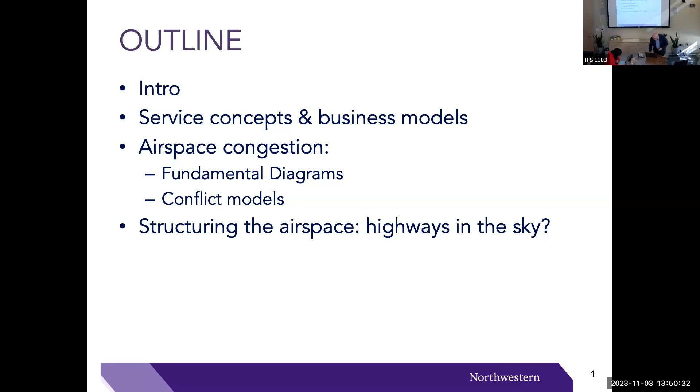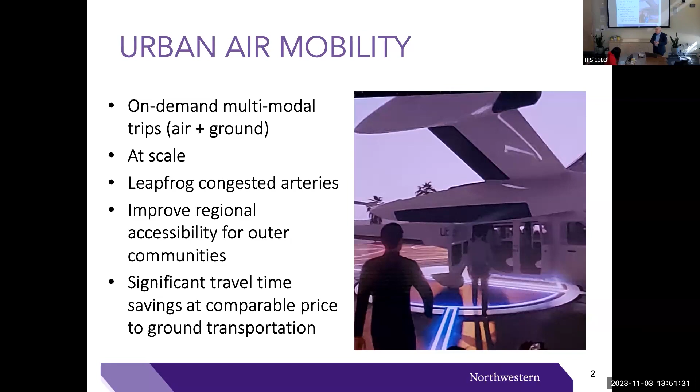Okay. And so the vision for urban air mobility is that it would be on-demand, multimodal trips where you have both ground, of course, for first, last mile, coupled with air, that it would be deployed at scale. You would leapfrog congested arteries. It would improve regional accessibility for outer communities, though it would also probably encourage more sprawl, which is not necessarily a desirable outcome, trade-offs here. Again, the vision was to have significant travel time savings at comparable price to ground transportation. So if you compare it, let's say, to rail transit, and if you can kind of bring it to the same price point, that was part of the vision.

Okay, and so there's over 20 companies that are very directly involved in developing the aircraft, but also in thinking along the lines of business models for providing service. These companies go from smaller ones, and so Joby is one of those. That's the company that bought Uber Elevate, along with all of the experts that were working in that area. And then you have various startups like Lilium, Volocopter, Kitty Hawk, and others. And of course, you have the big players, Airbus and Boeing are both very much in that space. And in fact, Boeing has acquired Aurora Flight Sciences, which is, again, developing tools in that area.

And you've seen different images of those. They typically have multiple rotors. Some of them, you start vertical and then they go horizontal. Others have multiple types. There's different designs there. You tend to have 4 to 8 different rotors, and these are envisioned to be electric. From a carbon impact standpoint, they would be unlike the jet fueled aircraft, right?

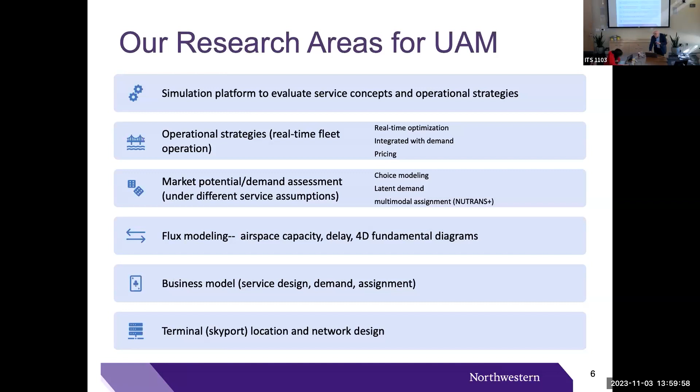And so in my presentation, we'll talk a little bit about dispatching strategies, but then mostly go into flux modeling and airspace congestion. The first one was part of the dissertation of Hani Ali Ahmad, and the second one was with Christopher Cummings, who is now actually working with United Airlines on some of these problems.

Okay. So there's 2 main service concepts that have been under discussion. One would be a skyport model, like Uber Elevate was considering, where you have a finite number of terminals that are strategically located along the area. Then you have air service between the skyports, so you could have some transfers potentially, as a way of consolidating the demand with an intermodal air and ground service. In some cases, you just stay in the vehicle, you don't get in the aircraft, depending on your trip.

Other times you will mostly use these skyports. And so that was an example in the LA area, if you were to locate 10 of these skyports. They're really vertiports is what they're calling them. They're fairly massive, and there's up to 300 transactions per hour that may be taking place there. So they're a very intensive kind of operation.

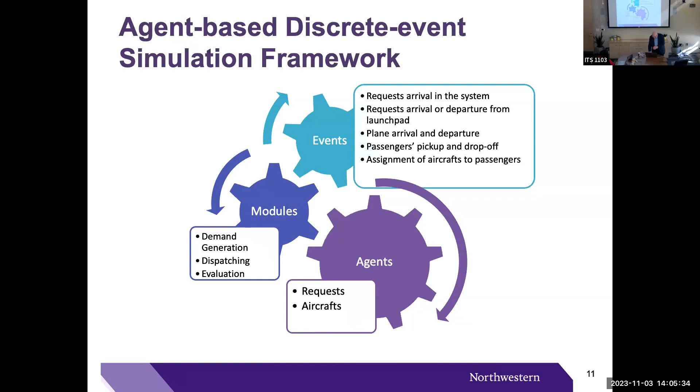What we wanted was to have the tools to evaluate it, given fleet, service, etc. We wanted the operator to be able to say, this is how many I can serve, and this is the kind of capacity that I would be getting from an assignment standpoint. Let's go quickly over the simulation tool that we developed to evaluate these kinds of questions, emulating the dispatcher operation, a fairly detailed dynamic optimization with a rolling horizon, where you have the network, the fleet, requests, new requests coming in, and we emulate what the dispatcher might be doing, and that's a whole other talk. All right.

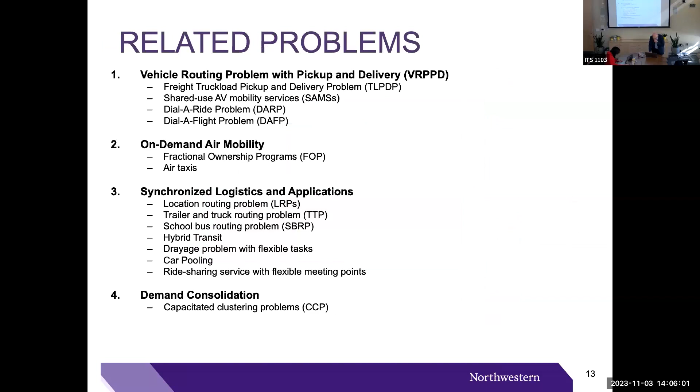So some of the main takeaways from that, kind of skipping because I really want to get more into the flow modeling. Demand consolidation could in fact significantly decrease the aerial mileage per request and also increase the number of served requests, which in turn increases the total travel time savings compared to ground-based transportation. The effectiveness of the demand consolidation scheme is dependent on the demand pattern, how dense versus sparse it is, and the pre-specified level of service, that is, the maximum tolerable delay before you embark on the trip, has a significant impact on the number of rejected requests. So there's quite a bit of sensitivity to that factor. And this is all based on the analysis that Hani had done.

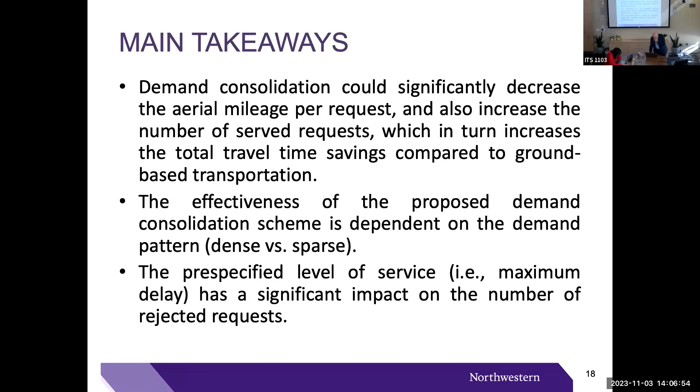If any of you are interested in that side of the work, I didn't want to get into it because it's really elaborate formulations on the optimization side. And it's hard in 15 minutes to convey all of that if one doesn't have the full background. Whereas the flow modeling, I think, is much more reachable. And frankly, we've done a lot more interesting work, in my view, on this side right now. But if any of you are interested in the service model, the real-time dispatching and so on, we have a couple of papers, I'd be happy to share them with you.

Okay, so the question that came up was, what happens in the sky? Is there that much capacity that we could deal with all of that demand? We really didn't know when we started looking at that. And some of the motivating questions, as I said, were how congestible is airspace compared to highways? Does adding a third dimension solve urban traffic congestion problems? What might be a practical capacity for such systems, and where is the bottleneck?

And what is the effect of different spacing requirements between aircraft, horizontal and vertical? And what is the effect of the maximum speeds of aircraft? Does that really change the flow patterns that emerge? And so we thought that as urban air mobility scales up and more vehicles enter the airspace, operators and regulators will need an understanding of air traffic flow.

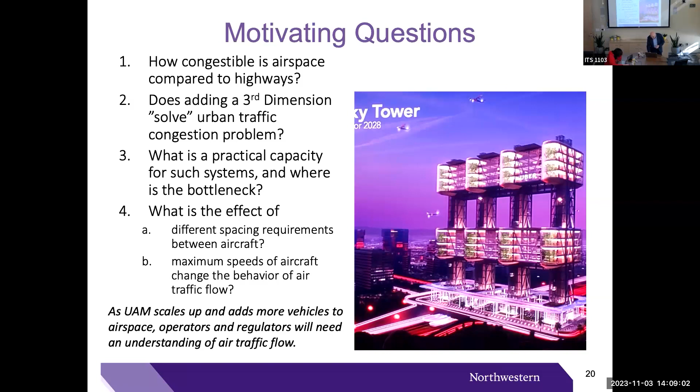And the image that I have here, this is a rendition of what these horrible vertiports would be looking like. They would be massive structures, and that was in some of the early Uber Elevate kind of visions. And you don't want that in your neighborhood, right? But that's kind of the model that they had envisioned, and then they hired top architects to design a much better looking and integrated kind of vertiport. But that was one of their initial proposals.

Okay. So some basic concepts here in aircraft routing. There's different types of routing through airspace. Basic flight would be no routing restrictions, and the aircraft are responsible for self-separating. Basically, that's what birds do, right? They figure it out, they manage their conflicts. The other one is free route, where there's no routing restrictions except for advice and deconfliction from an urban traffic manager. Or you could be in corridors.

Or you can have fixed routes. And so this is where, like system optimal routing on highways, for instance, you determine for each aircraft what route they should follow, and there is a central controller that is providing these fixed routes. And this gives you an opportunity to manage it best.

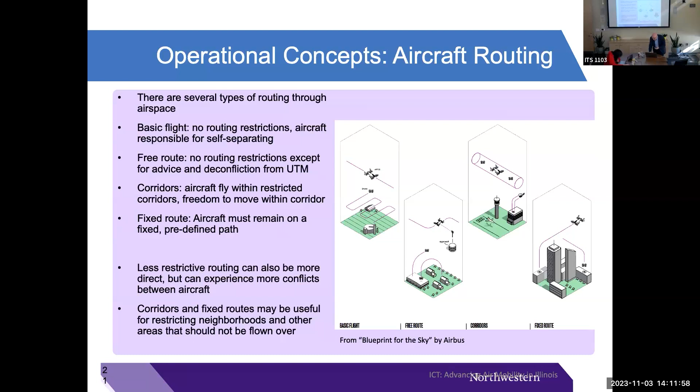So, okay. There's been a growing literature on the airspace management angle. But nobody had examined the congestion part, which is where we came in ultimately. There have been several new airspace concepts proposed to integrate advanced air mobility operations into the existing system. The Federal Aviation Administration has documents outlining a concept of operations for these services. And part of what they're proposing is you have different types of vehicles, different classes at different heights.

And so your UAM corridor would be somewhere above the little drones that are flying, maybe the ones delivering packages and things of that nature. This is where the more serious urban air mobility vehicles might be flying. So they would be closer to 700 to 1,000 feet in height compared to below 400, which is reserved for the smaller fry there.

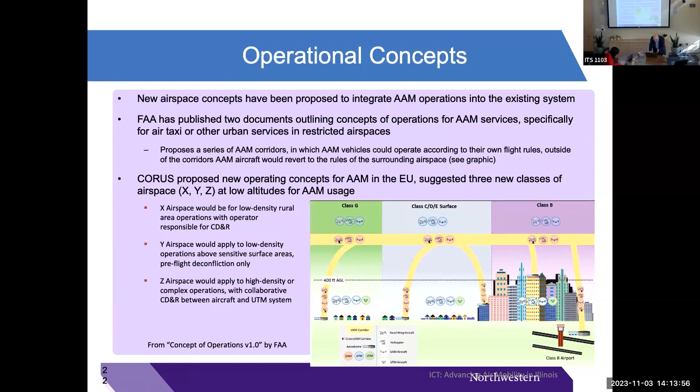And again, there could be multiple classes of vehicle here, and so they call it the XYZ concept, where X airspace would be for low density rural area operations with the operator responsible for dealing with conflicts and so on. Y airspace would apply to low density operations above sensitive surface areas with only pre-flight deconfliction, whereas Z airspace would be high density with complex operations with various collaborative features between the vehicles. So that's the concept of operations version 1.0 by the FAA.

And so when we got into this, my former student, Chris Cummings, was very interested in this topic. He was taking my traffic flow theory class. They have to do a paper. And I told him, maybe you should build a simple simulator, and let's see what emerges, and that's what he did. Because my notion was, we should see a fundamental diagram emerge.

Because for birds, for many species, we tend to see fundamental diagrams. And I said, just build a simple simulator and let's see what emerges. So he built a simple simulator to emulate these aircraft and then look at how this, does it congest? Do we get a fundamental diagram? And can we then use concepts from traffic flow theory to examine this situation?

And so in his simulation, he used a decentralized system of air traffic control, where each vehicle is scanning for potential conflicts and then resolving them individually. So his initial simulation was more like free flight with decentralized conflict resolution. But he did the conflict resolution in a very careful way, and he found in the literature a nonlinear programming formulation for that problem, where you consider what's around you and then you can optimize your position accordingly.

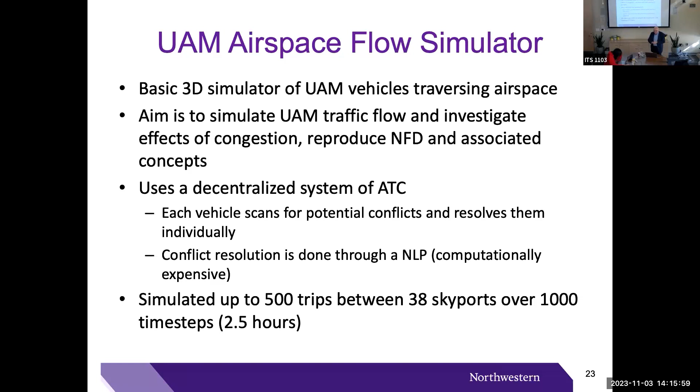Which means, simply speaking, if you sense a conflict, and where the conflict is an important parameter in this, if you sense a conflict, you're either going to deviate, or you're going to go up, or you're going to go down. And so those are the maneuvers that you might do. And he started by simulating just 500 trips between 38 skyports over a 2.5 hour period.

And in the assumptions he made, vehicles have true vertical takeoff and landing capabilities. He assumed them to be able to fly at up to 100 miles per hour horizontally and 25 miles per hour vertically, which is within the range of what industry tells us we would have. Then he did sensitivity to all of that. The minimum vehicle spacing was set to 30 seconds of maximum velocity, which is about 1.3 kilometers horizontally and 0.35 kilometer vertically. That's when you translate them at the maximum velocity of 100 miles per hour.

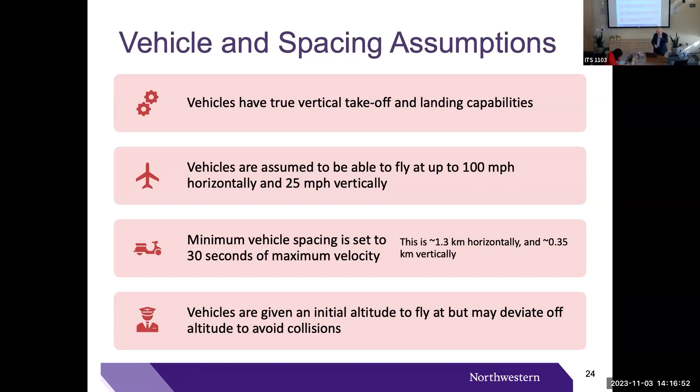And vehicles were given an initial altitude to fly at, but they may deviate to avoid collisions. So everyone goes to some level, and we had discrete levels to which these aircraft were going. And so I can show you what the simulation looks like. Okay, so this is the top view, and the blue squares are the vertiports, and so you have travel between these vertiports. This is a top view, and then you have the side views here, and this is the 3D view that you could see there.

And so you could see them going up to a certain level, and in some cases they drop down to go back to their destination. In this case, it's still not getting too congested, but let me move it a little faster. And you could see there's a lot of balls in the air, right? And you could start seeing conflicts that are forming, and you could see them slowing down also at some of these levels because of the conflicts that may be developing. And we can have a little bit of bottlenecking happening in there. This is our first set of simulations.

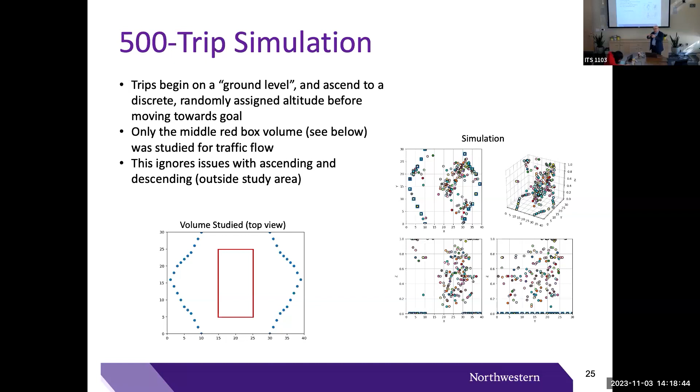So for the vehicle, this should have a speed range, otherwise they'll drop down, right? Yeah. Well, they could hover. Oh, yeah, they could hover. There's no problem with hover. They don't communicate, right? Or do they? You're sensing the vehicles around you, so yeah. So you're just dancing. There's no actual communication between the vehicles. There is not much coordination. Well, there is coordination because we assume that there is a central controller that's deconflicting, but only among neighbors. Only among neighbors, not for the entire system. It's decentralized among neighbors.

And so we then said, well, let's go back to our basic traffic flow theory here, right? So what we did is extended essentially Edie's definitions to 4 dimensions. In the original traffic flow theory, we had 2 dimensions, which is X and T. When we went to networks, we had X, Y, and T. Now we have X, Y, Z, and T. And so this is why it's 3-dimensional space, but 4-dimensional fundamental diagrams.

And in this definition here, if you look at the definition of the average flow and the average density, it is extending Leslie Edie's definition, where to get the flow, it's the sum of the distances traversed by all of the vehicles over an observation period. So DI is distance traveled by vehicle I, summed over all the vehicles, divided by the dimensions X, Y, Z, and T, because the vehicles can go everywhere in that space. And then to get the density, it's the total time, the sum of the time that is spent by the vehicles.

And in this case, our observation period is this X and Y that we're considering, but the entire depth of that. Okay, and of course, then you get the speed is just the average speed, this total speed divided by n. Yeah. So Hani, you have 2 speeds. Q divided by K would be the total distance divided by total. Correct. You get the same thing. Yeah, exactly. But I'll get more to speed because then there is an effective speed, effective flow.

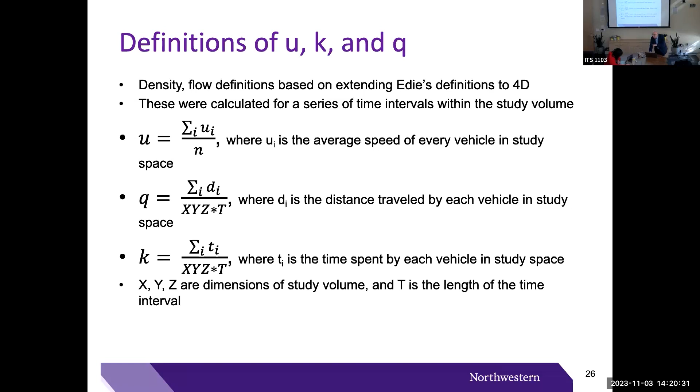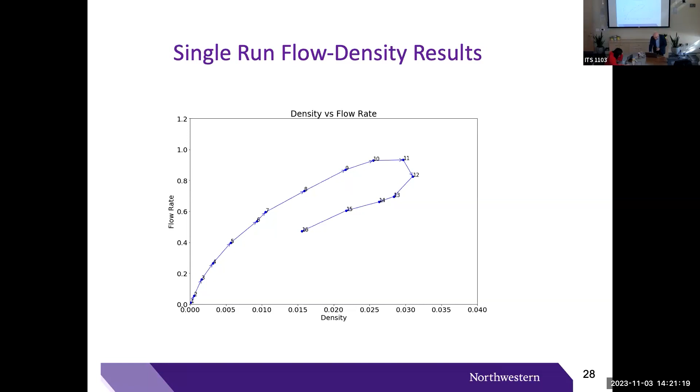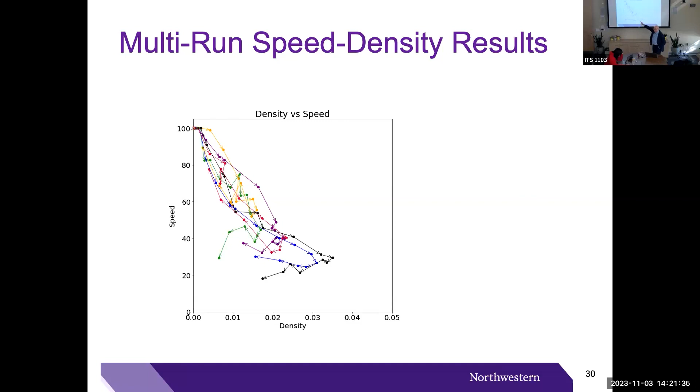So that was how we got started in this, and we did multiple runs, and they were all showing us the same thing. And then we varied a few elements, and then you plot the speed versus density, again a similar pattern with the hysteretic part that goes on the other side. But that was a starting point. We said there's got to be a way to do better theory, because this is something that emerged empirically.

And so Chris started looking at a gas theoretic model, because these are like particles of gases essentially. And so he built a theoretical model where vehicle density creates conflicts. That's the starting point, because more vehicles in airspace increase the chance of conflicts for each vehicle. Second, conflicts decrease the effective speed and the actual speed. Effective speed is the speed in the direction that you need to go. So if you're going back and avoiding and all of that, that's a reduction in your effective speed.

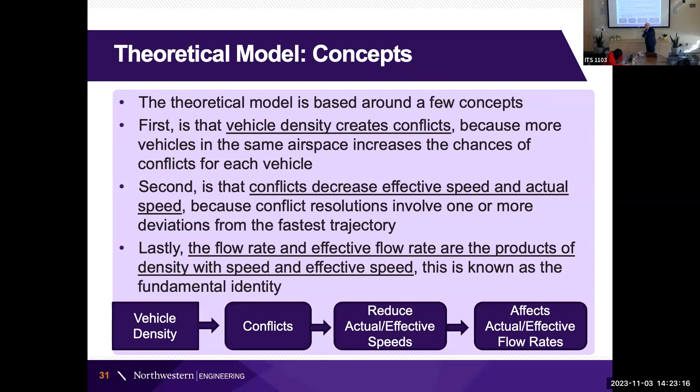So it's a directional speed basically, because conflict resolutions involve one or more deviations from the direct trajectory. Also, the flow rate and the effective flow rate would be products of density with speed and effective speed. That's your fundamental identity, and it holds also for the effective speed. So the idea was to go from vehicle density, look at the impact on conflicts, try to quantify that, then capture how this reduces the actual effective speed, and then how that will affect your flow rates. And so your speed-density relationship goes through the impact on conflicts first, and similarly your density-flow relationship, or your fundamental diagram.

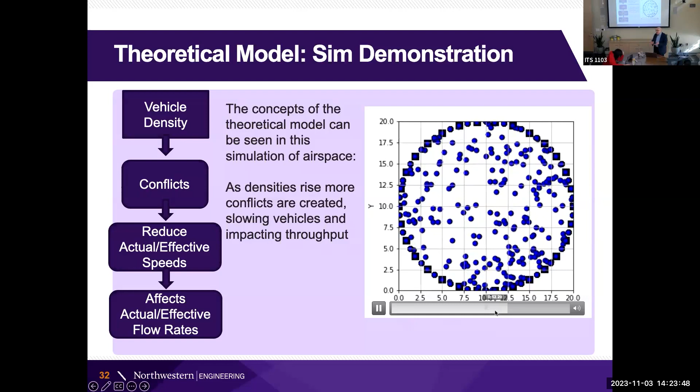And so to illustrate that, another simulation: in this case he had them placed in a circle, this is the top view. But essentially he did a bunch of simulations where he was measuring the conflicts. And so you could look at this here, and you see that as these densities are increasing, the conflicts are increasing. So he found some interesting work that used a gas law model for predicting conflicts in airspace.

Essentially, it works by estimating conflicts in the airspace in front of each vehicle, where C is the number of conflicts, D is the separation distance, so if you're within that distance, then you have a conflict, so you have to maintain it. If the separation distance is large, there's going to be effectively more conflicts being diagnosed, because it's more likely to have a vehicle in there. So the conflicts increase with the separation distance because they catch more other vehicles.

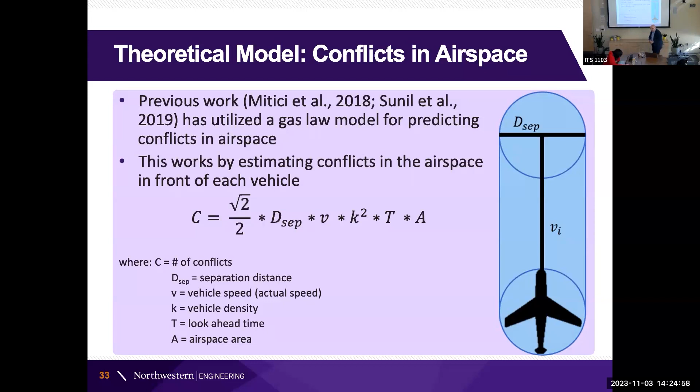It depends on the vehicle speed, the square of the vehicle density, the look-ahead time within which you're determining if there's a conflict or not, and the airspace area. Again, the larger the look-ahead time, the more likely you're going to declare a particular vehicle a conflict. And then A is the airspace area. And we counted the conflicts as a function of density, and sure enough, these are the simulated points, and this is the theoretical relation. Very nice R square. We estimated the points with that formula, with the given separation distance, etc. And that's what we got. So that was a pretty nice fit.

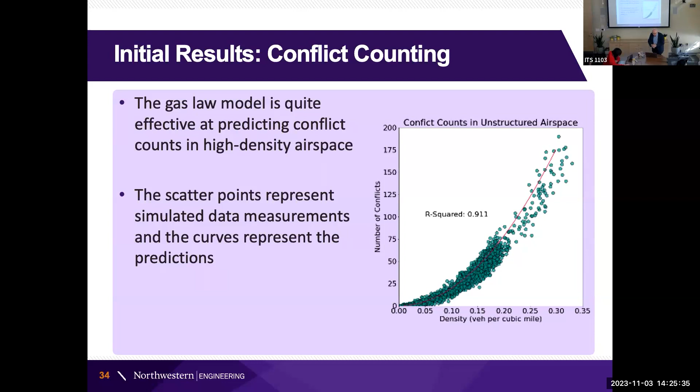And this is what you would expect, that the conflicts increase non-linearly with increasing density. The red line is given by the formula? Correct. Yeah. It's the one we estimated according to the formula. And so then you can go from that to how it impacts the speed.

And so then the average vehicle speed is negatively impacted by conflicts. So you have Vmax minus the number of conflicts times a constant B divided by N. And here B is the speed loss per conflict, basically. So C is the number of conflicts as predicted by that relation.

And so using conflict count here, you plug in the expression for conflicts and you get a relation between the average speed and density and the separation distance again. And that illustrates the relation between average speed, maximum speed, separation distance, density, and conflict resolution. Vmax is the maximum speed there.

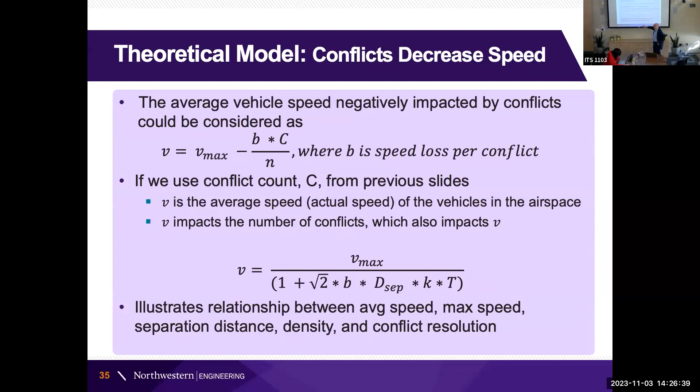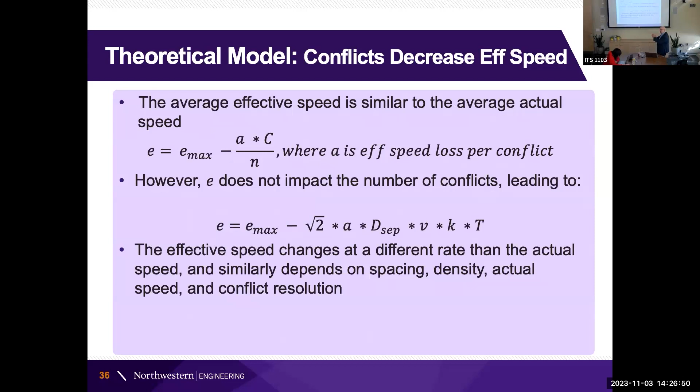All right. And so you can do a similar thing for the effective speed, where effective speed is the speed in the direction of travel. And this is now the theoretical models that you obtain. Depending on the spacing requirement here, you get different conflicts versus density, where you have the fewest conflicts when your separation distance is small. As you increase it, conflicts increase with that.

And then you look at the speed versus density, it kind of reverses, right? Because you then will have less of an impact on speed when you have smaller separations. You can similarly look at the effective speed versus density, same relation, just different numbers. And then you can look at the effective flow versus density, and that's your fundamental diagram right there, as it is impacted by the separation distance.

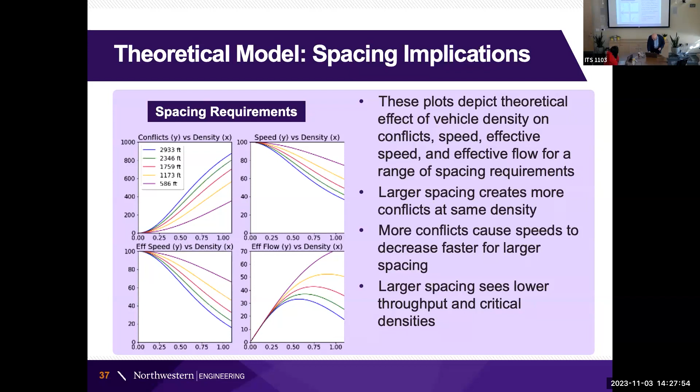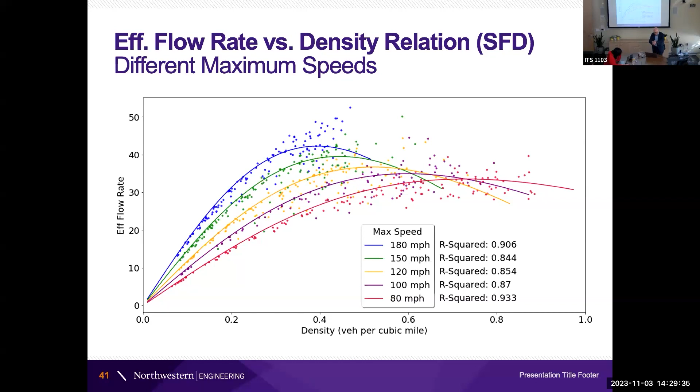All right, so see here. Okay, next I'm gonna talk about how do we manage this process ultimately. So we're gonna look at some network architectures and air traffic flow, applying these concepts and using that simulation framework that we have. In the interim, we had run what is the impact of restrictions. We started putting bottlenecks and restrictions here and there. And then from that, he built a tool to evaluate different network architectures.

And so some structures, such as geovectors, which basically give you a direction in which to go, corridors, restricted airspaces, can be combined to create different network architectures. For example, an unstructured network versus a network of corridors. Then these are applied at the network level, looking at measures of travel time, travel distance, conflict rate, capacity, etc. And so Chris built different network architectures and simulated them to explore the broad impact of these structures.

So he considered 4 architectures. One is unstructured with no restrictions. Geovectored network, where you have heading restrictions by altitude level. Free route corridor network, so these are regions of unstructured space that are connected by wide corridors. So you have freedom of routing within them, but there are restricted areas. And fixed route corridor networks. This is where you have to follow a fixed route that's given to you, no freedom of maneuver.